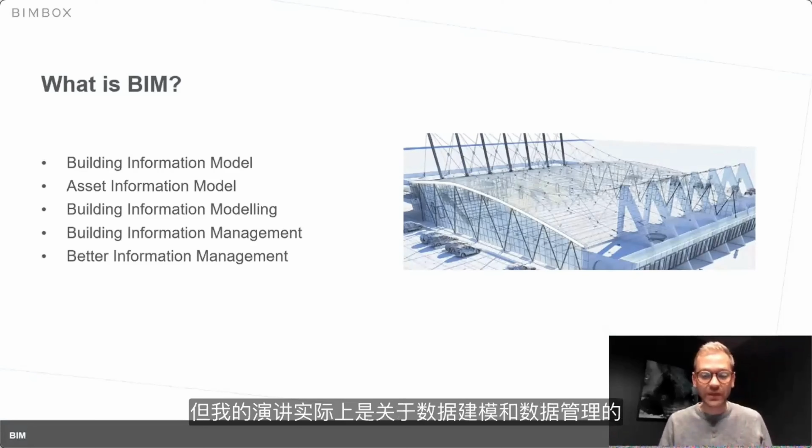While there are different definitions, one thing is constant: it's information management. To be honest, the term BIM originated in the 1960s when there was no computer software to manage 3D modeling. So the talk was actually about data modeling and data management. So rather than concentrate on the technology, we concentrate on the process. Today, BIM is all about the process of how we manage information and data. And currently, it is underpinned by the international standards 19650 series, which is applicable across the globe.

So we have an opportunity to increase the value of our data collection activities to support environmental, social, and even human goals.

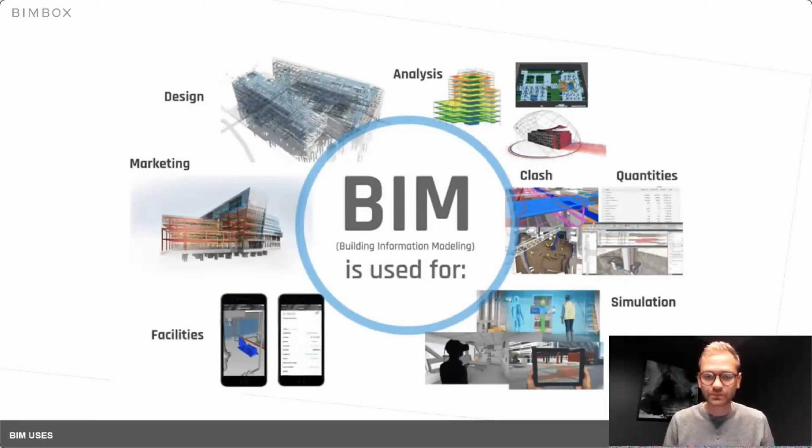So let's have a look at what is currently happening in this field of BIM and construction demolition waste. We have kind of two separate strands. One is BIM, and the other one is construction demolition waste. And they don't really talk to each other, or there haven't been many use cases. So there are quite a few research papers looking at how it could potentially work, but there aren't many use cases of how it is being utilized on real projects.

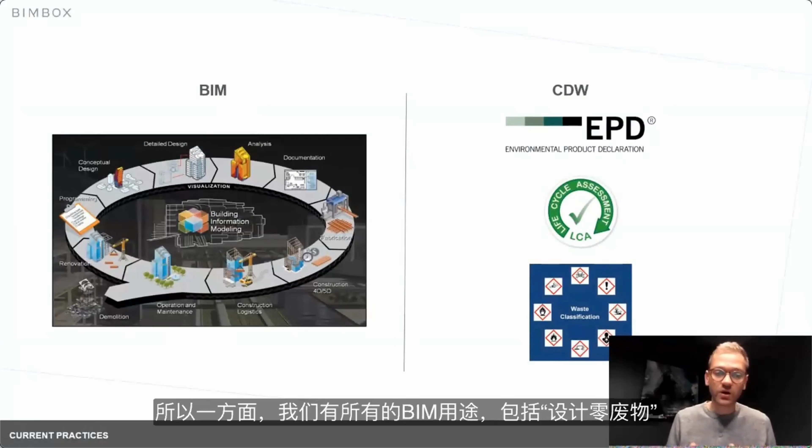So on one side, we have all those BIM uses: design for zero waste. You actually design out the waste. It's probably the best way to minimize waste, to eliminate it. But we know that it's not actually happening on every construction project. So we have other uses such as clash detection, where we can build the building in the computer first, make sure everything is coordinated before we build it on site.

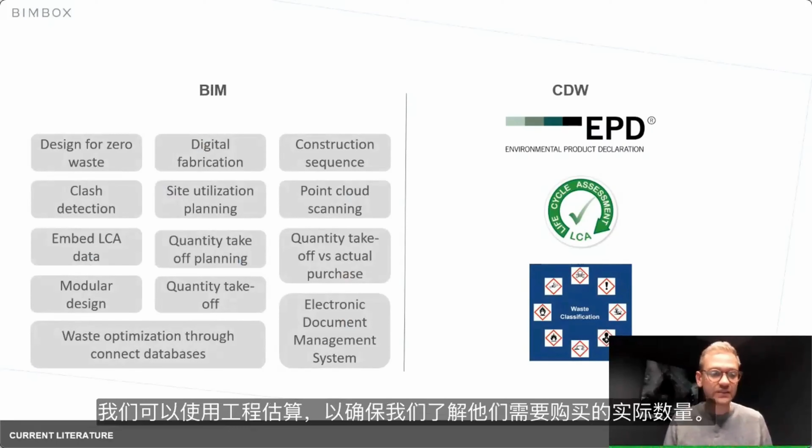We can use site utilization planning to make sure that our equipment is stored in the correct way and there is no wastage in that. We can predict how much waste we're going to generate. We can predict how much waste we need to take out, for instance, while digging the foundation, etc. We can utilize point cloud scanning for identifying the rubble on site. We can use quantity takeoffs to make sure that we understand the actual quantities that are needed to be purchased.

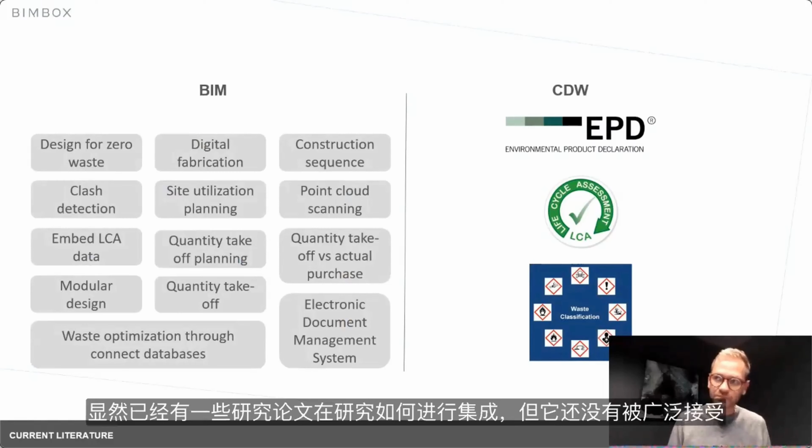So there are quite a few different BIM uses that have the primary focus on time, money, and quality, and the secondary target of waste minimization. On the other hand, we have initiatives like environmental product declaration, life cycle assessment, waste classification, but they all seem to sit slightly separately from building information modeling. There are obviously some research papers looking at how it could be integrated, but it's not yet a widely accepted practice.

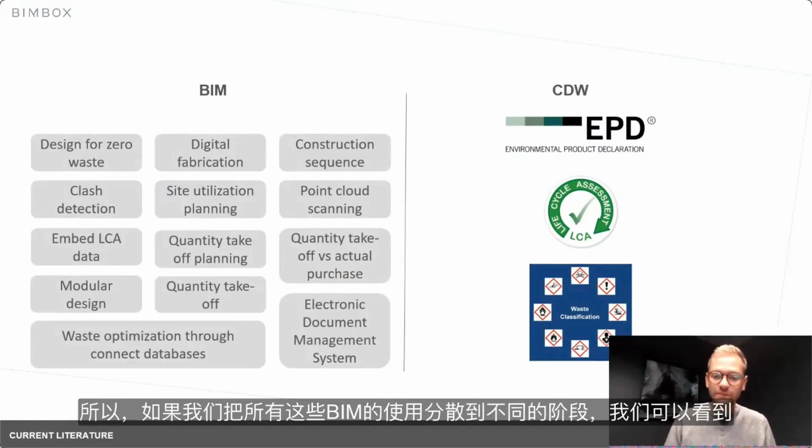So if we split all those BIM uses across different stages, at design stage we can eliminate waste by designing it out. We can use clash detection tools to make sure that we minimize errors on site. At the procurement stage, we can use quantity takeoff to see how it compares with actual purchase. We can utilize digital fabrication to minimize, again, waste, so it's exact when it comes on site. During the construction, we can use construction sequencing, site utilization, and again, quantity takeoff planning.

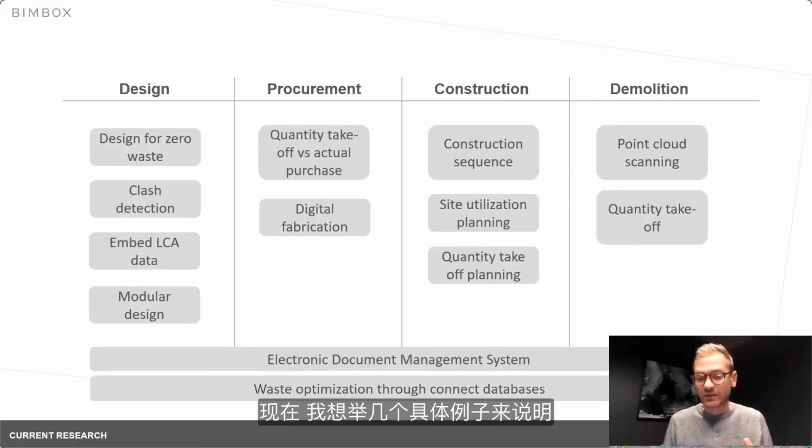And at the demolition, we can utilize point cloud scanning to make sure that we have accurate representation of what's on site and what kind of waste we're expecting to see. All of that is underpinned by an electronic document management system to make sure that we're managing this information. Now, I'd like to give you a couple of examples of what is happening at the moment. And again, it's not really a primary focus on waste minimization, but these use cases can actually be utilized to minimize waste.

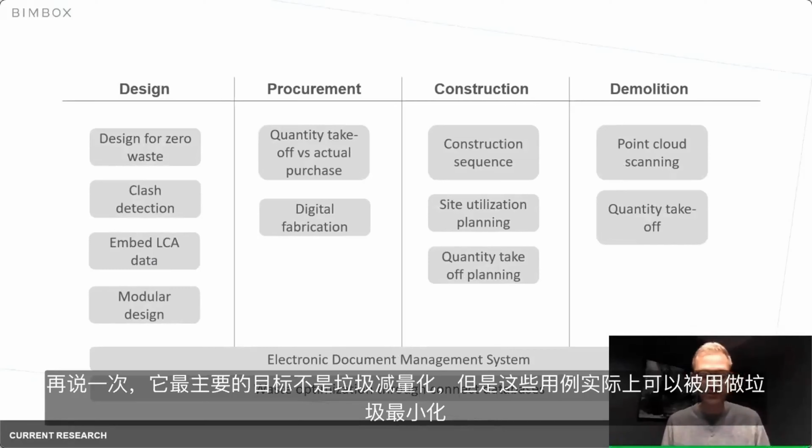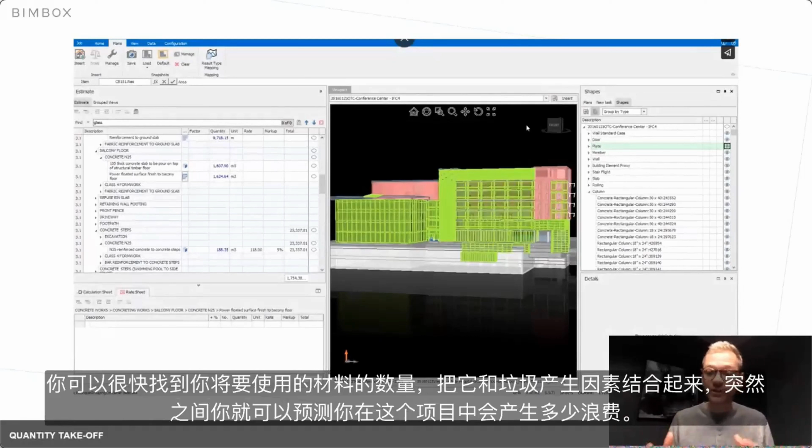So one of them is, let's say, quantity takeoff. It is actually quite simple to extract the quantities once you have the model represented digitally, and you can quickly find the amount of material that you're going to use. Combine it with factors of waste, and suddenly you can predict how much waste you're going to generate on the project. Another example could be looking at site utilization and site logistics, and looking at how we transfer waste in the most efficient way. Where do we store it, and how many trucks need to come in to pick the waste up, etc. So it informs us to make better decisions.

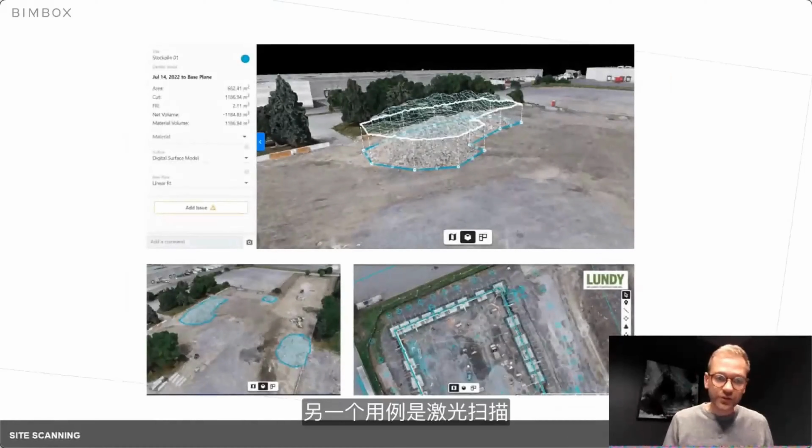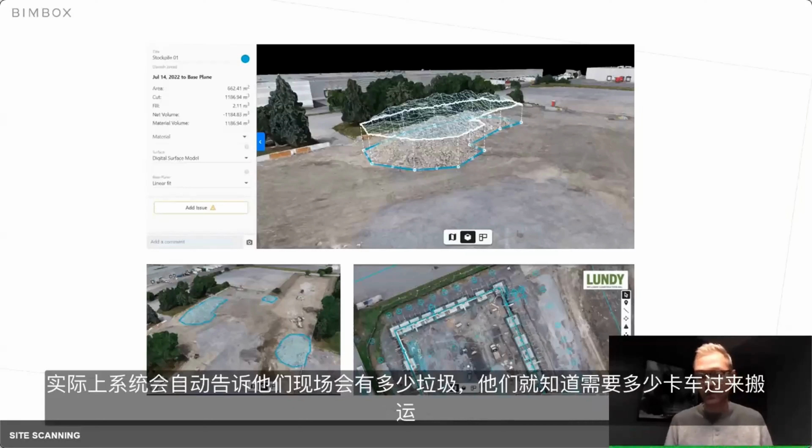Another use case that I would like to show is laser scanning. So this is an example from Lundy, a contractor who is utilizing site scanning every week to identify how much rubble they have on site. This in fact informs them automatically how much waste they will have on site, which informs them how many trucks need to come in and pick that waste. So it's quite a powerful tool to utilize.

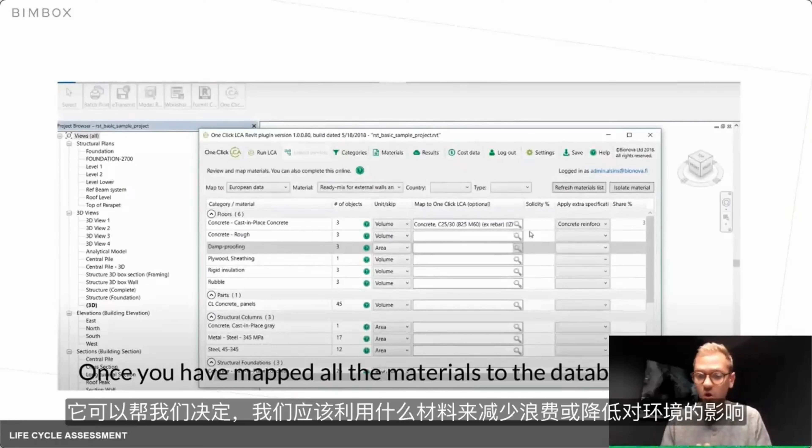In another example, we're looking at databases of lifecycle information being connected to building information models, and again, it informs our decision on what material we should utilize to decrease waste or to have a lower impact on the environment. So as you can see, there are quite a few use cases around, and we use different software applications for different purposes. And that creates a little bit of a challenge.

So what is it that we're looking at in the RECONMATIC challenge? In fact, we have quite a few consortium partners. We have, I think, 23 consortium partners looking at very different fields. But today I would like to concentrate on one subtask of the project, which is looking at building information modeling and information exchange between the software applications.

So what we try to achieve in this subtask is to define the structured machine-readable information exchange for waste information. You remember I showed you this slide of BIM uses, and to achieve those BIM uses, there are multiple, probably hundreds of applications that try to target each of the BIM uses.

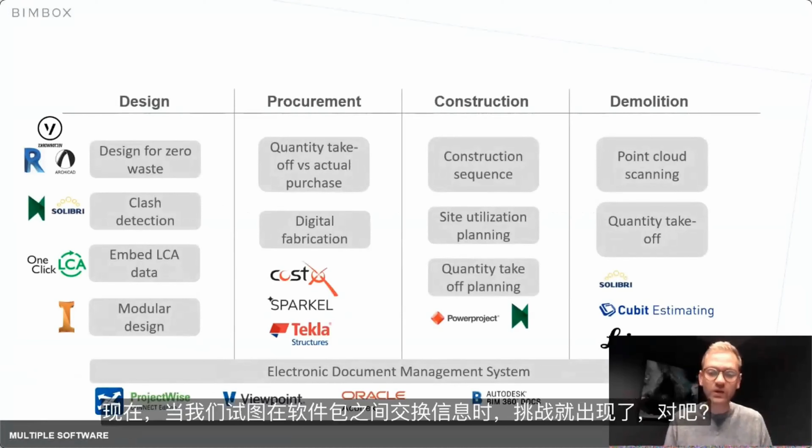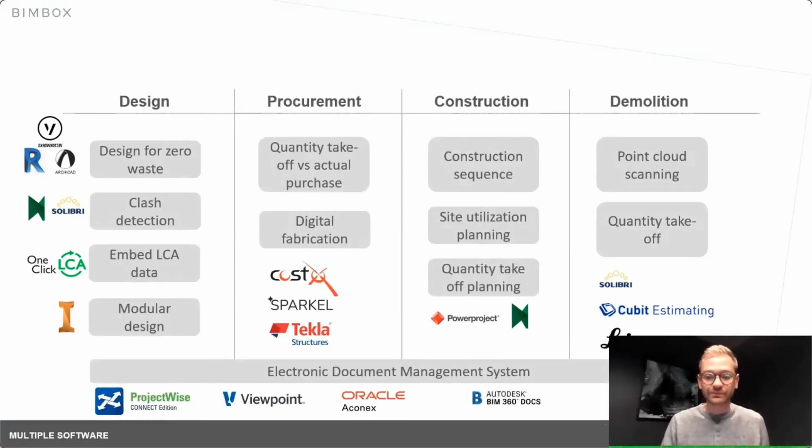Now, the challenge begins when we try to exchange the information between the software packages, right? Because each software package will have their own way of working, and to transfer information from one package to another package is quite challenging. So what we tried here at this project is actually define an open BIM methodology to exchange information between those different software packages, and that will eliminate the time you spend on mapping the properties or losing information in the meantime, and actually create this common thread so that we can trust the information when we exchange it.

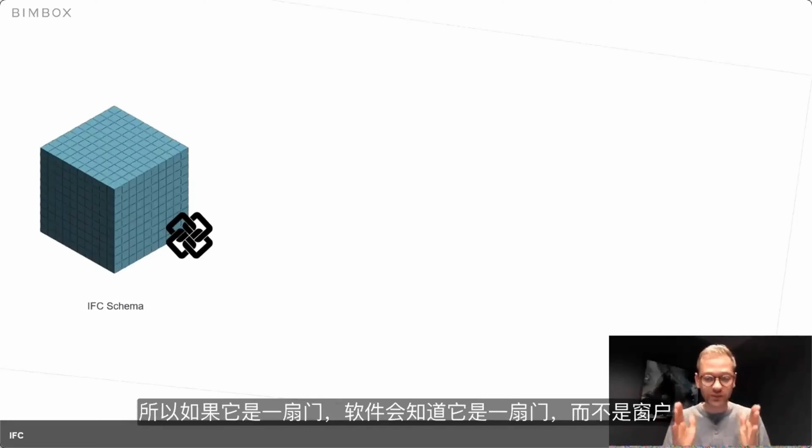So to date, we have looked at what is called Industry Foundation Classes, or IFC in short. It's a schema that defines every construction product that there is, and defines the properties that should be included. This can be read by different software applications, right? So it doesn't matter what software you use. Once you import that data, your software understands what it is. So if it's a door, the software will understand it's a door, not a window.

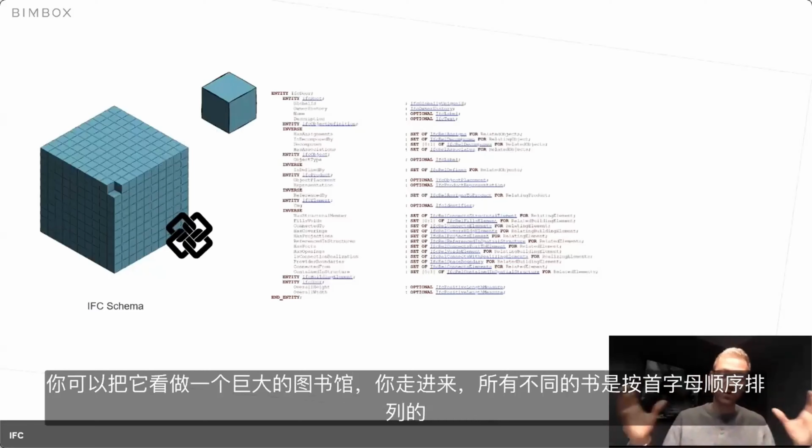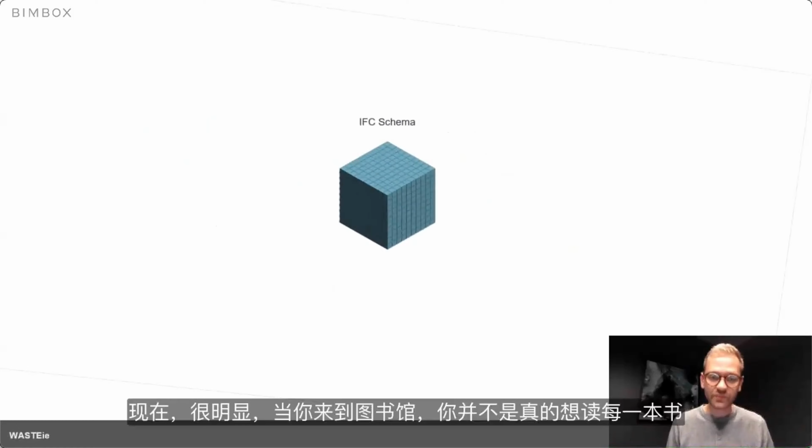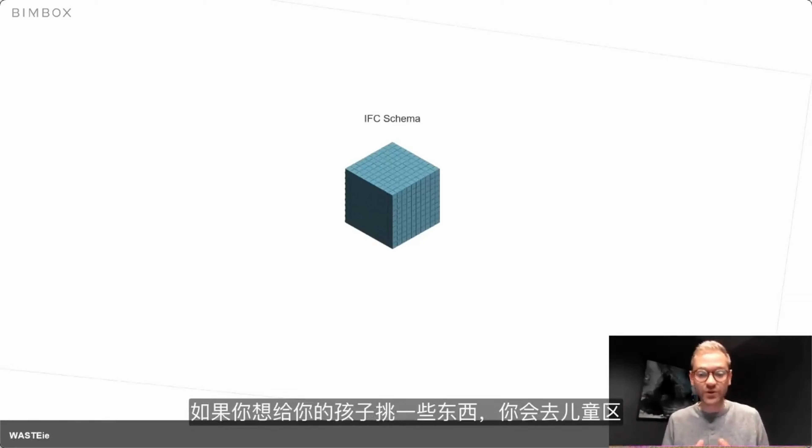So as I've mentioned, it could be seen almost like a massive library where you come in and you have all the different components in alphabetical order, right? So imagine it as being a big library. Now, when you come into the library, you don't really want to read every book. So if you're interested in science fiction, you would go into the science fiction department. If you want to pick something for your kid, you would go to the kids section, right? Similar idea is with the IFC schema. We don't exchange all the information that's out there. We need to define the purpose of the information.

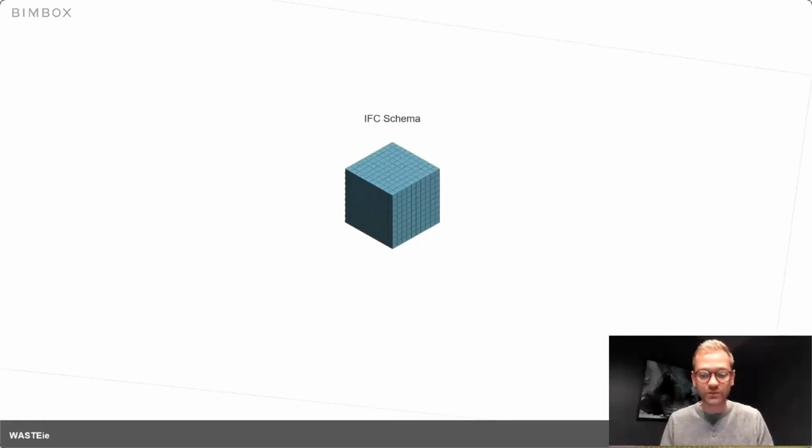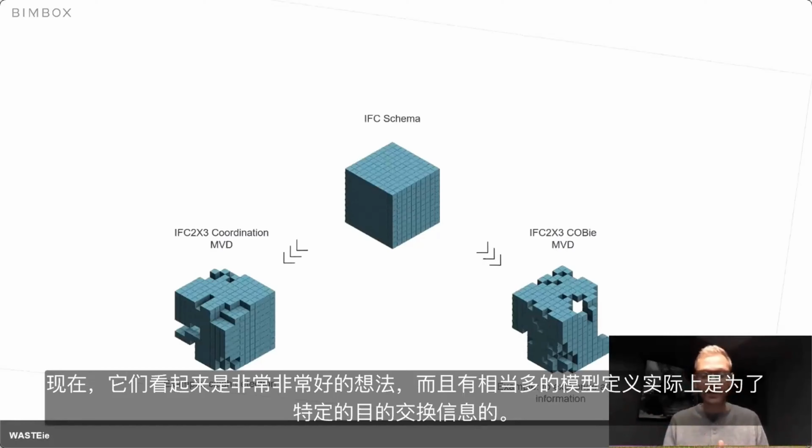So for example, if you want to coordinate or do a clash detection, you can exchange the coordination model view definition to do that particular task. If you want to extract information from your model about facilities management or asset management, you would use something called the COBie model view definition. Now, these seem like great ideas, and there are quite a few model view definitions that actually exchange the information for a specific purpose. However, there is a small challenge.

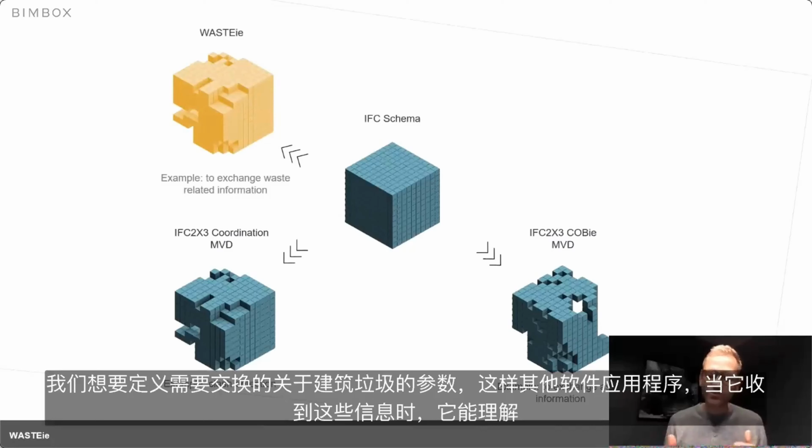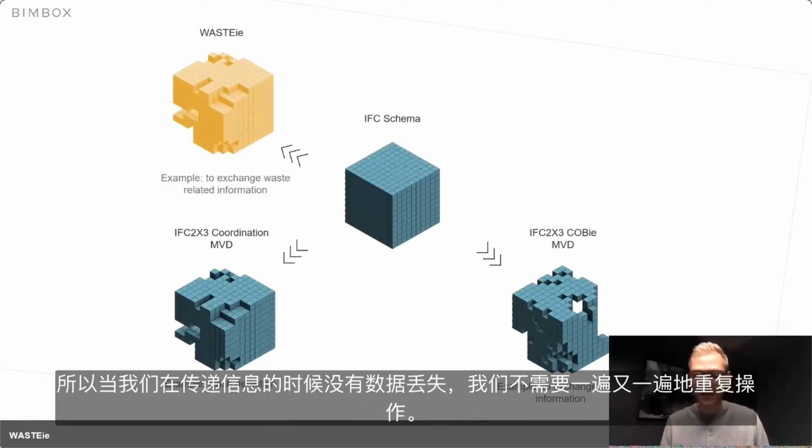At the moment, there is no defined way of how to exchange information about waste. And this is exactly what we're trying to achieve in this project, in this small subtask that we're involved in. We want to define the parameters that need to be exchanged about waste, so other software applications, when they receive this information, understand it. So there is no data loss when we're transferring the information, and we don't have to repeat tasks again and again. In a more graphical representation, what we're trying to achieve is for one software to understand the other.

Once you transfer the information, you can actually transfer it back without any data loss, and that would make information management in the waste industry a little bit more efficient. So it's going to be quite a challenge to define it, and we're really looking forward to what it could be. So we'll be looking at the whole life cycle of waste, where it travels, where it begins, how it is designed, what information is required at the design stage, at the construction stage, and at the demolition phase, right? So this is one of the challenges in this project.